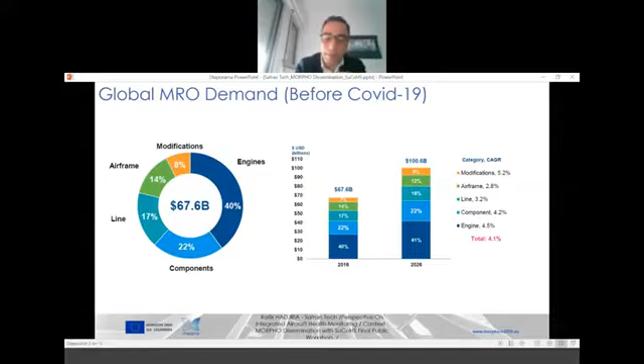As Safran is an OEM, we manufacture and design nacelle, landing gear, engines, and things like that. Our idea is that we would like to enhance our knowledge and expectation about the MRO market, and also enhance lifecycle management of our product. This is why we are mainly interested in structural health monitoring.

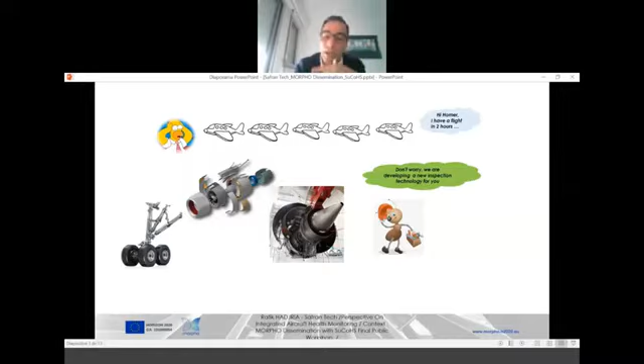The idea is also to accelerate the integration of new sensing technology in our projects, to prepare for the future. So with Morpho and the SHM concept, the idea is that we have an onboard sensor to try to acquire data and get information about the health assessment of our structures.

But in this sensing technology, there is a part which will be integrated within the aircraft or vehicle. However, electronics may be off-board, and the data acquisition and analysis will be off-board. So SHM is a technology where the challenge is that we have a part which is mainly on-board, and also a sub-part which can be off-board.

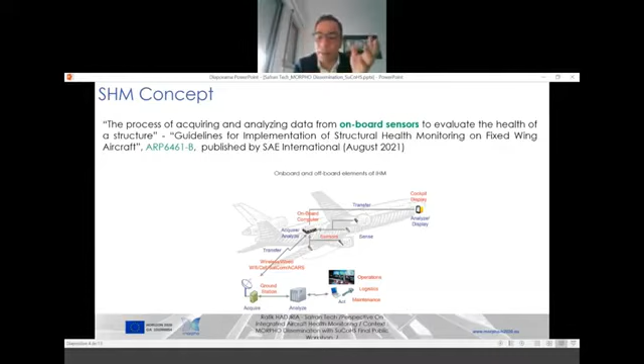These are materials, I would say, from SAE International, which I belong to. I work with industrial partners within ARP6461, published in August 2021, about the interest of structural health monitoring for regulation and standards. Allow me to share with you some achievements from Delta TechOps.

There is an interest from MRO regarding the integration of structural health monitoring systems within inspection. There is a program between Boeing and Delta TechOps about the integration of sensing technology for NDI inspections, because Delta Tech sees this technology as an integrated NDI inspection.

Here we see that some sensing technology has been integrated within the aircraft, and we see a guy from maintenance taking an acquisition system to interrogate the sensor and get information about the health assessment.

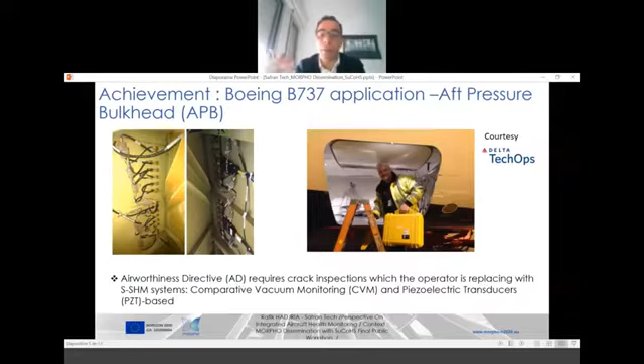This is not just a proof of concept that isn't used by the operator, but we can consider that when a company like Delta TechOps takes the opportunity to test such technology, we see that there is an interest to use it as a new inspection tool.

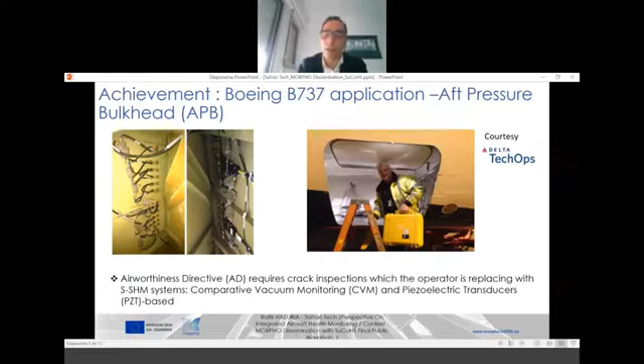Also, the FAA and authorities have an interest in structural health monitoring. They have drafted an advisory circular, 43218, which has also been addressed to the MSG3 consortium to talk about the opportunity to have a health monitoring system to respond to the maintenance strategy.

A new issue paper has also been drafted and presented to the MSG3 consortium, to talk about the interest of having a health monitoring system to move forward from traditional inspections, and also to move forward condition-based maintenance. However, as aeronautics is mainly conservative, it's a great challenge, I will say.

But when we see that the authority has an interest about this technology, we are convinced that we can use it in the future. I'm not talking about the actual program, but about a program that will be launched maybe in 2030 or 2035. We are preparing the future again.

This is why I will say that from Safran's perspective, we are participating in Morpho projects. This one is funded by Europe, and the idea of Morpho is that we would like to integrate sensing technology to get health assessment of our composite parts, mainly about an engine part which we call the fan blade.

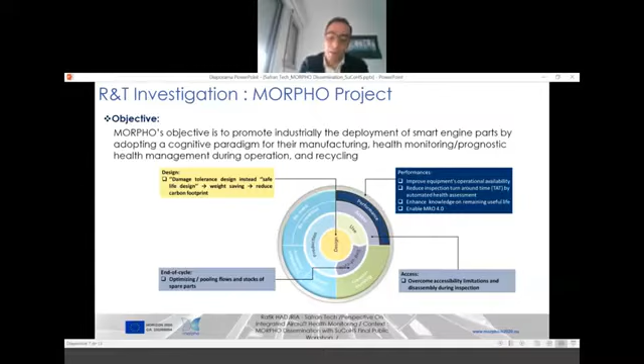This is why in Morpho partners we have about 10 partners. We have Sentisite, represented by Nikos. We have a sensing provider like I-Sens, and also many companies based in Europe. This project is managed by l'École nationale des arts et métiers in Paris.

And Safran Research Technology is a part of this. We also have an advisory board composed of EASA, Stanford, and other researchers from Europe.

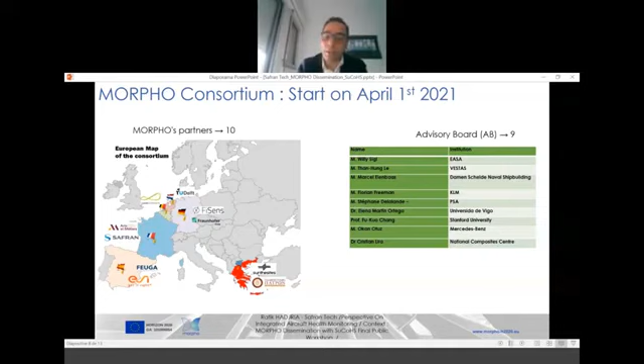If I continue about Morpho, the idea is to enhance the life cycle monitoring of 3D woven composite parts. From the manufacturing process, we are using the RTM process.

Our objective is to integrate new sensing technology within the RTM process to enhance our knowledge on it, and also to analyze the data and try to control this process so that we will have repeatability between our manufactured parts. During operation, we are talking about structural health monitoring in the sense of health assessment and usage monitoring.

Regarding health assessment, we have an interest in diagnostics, also prognostics, and remaining useful life. And we have an interest about impact events and stuff like that.

The idea is to get knowledge about the detection of an impact based on these different sensing technologies and move forward the remaining useful life.

At the end, we would like to recycle our 3D woven composite to try to embed it within the circular economy, where the idea is that this recycling process will be used to manufacture new projects and things like that.

So our proof of concept within this Morpho project, we are using what we call the foreign object damage panel. Such a panel is mainly used in the RTM to test structures regarding impact events. This foreign object damage panel is a substructure of the fan blade.

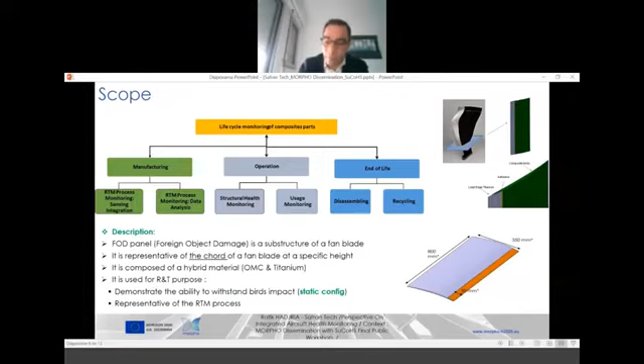Here is just a brief presentation of the RTM process. We have many stages, and the idea is that we'll integrate sensing technology for the RTM process to monitor the temperature, the curing process, and many physical parameters that we would like to get knowledge on.

In the future, we would like to control these parameters to get repeatability between the manufactured parts. Once part of the sensing integration is okay, we would like to use the sensing technology as a part of the SHM operation part.

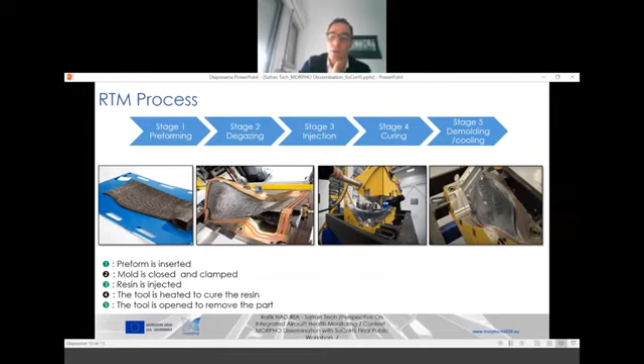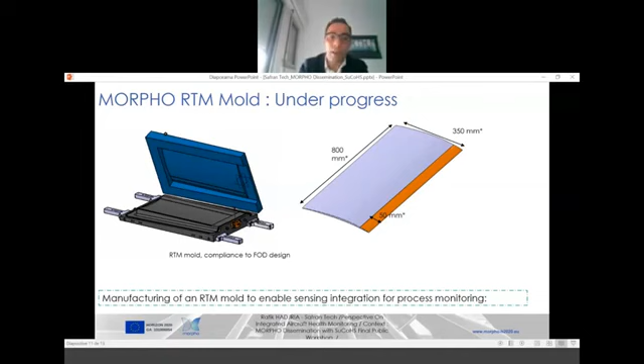We would also develop electronics that will help us acquire data and transmit it. There is also a great part of this project related to data analysis based on advanced signal processing and artificial intelligence to move forward condition-based maintenance.

We have mainly an interest in the remaining useful life of our proof of concept before reaching the critical damage state. So this is mainly the concern of the Morpho project. That's enough for me. Thank you.